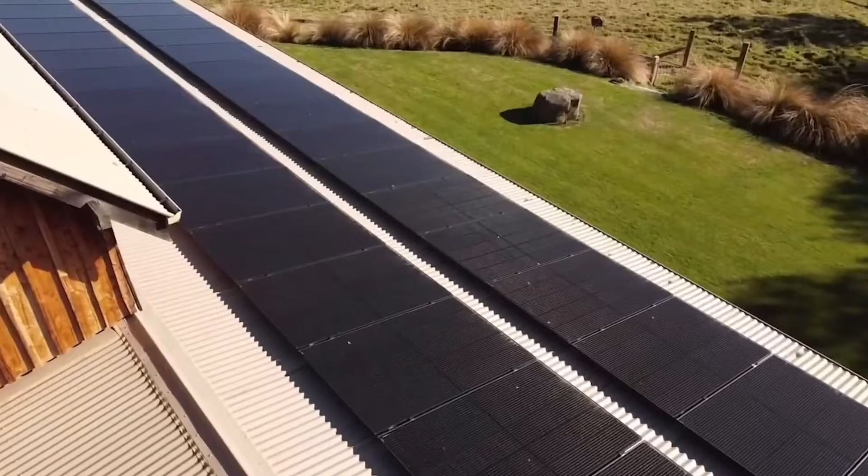I'll leave it to the experts tonight, but just give you a quick 2-minute overview of Lightforce and how we get to here.

Originally from the UK, as you can probably tell from the accent. I was an electrician by trade and went off travelling about 15 years ago.

Landed in Australia and we were there just as the Rudd government released the subsidy for solar. It was 2008, solar just started to take off. I was installing panels over there, and then I decided to move to New Zealand and expected to see a pretty similar landscape, and arrived and there wasn't a panel in sight.

There was a car battery and one panel on Rakino Island, and it's still working today, amazingly.

We basically were subcontracting. I started the company 8 years ago, it was man in his van, and we were subcontracting for all the different companies at the time that entered the space early. Most of them have subsequently been and gone.

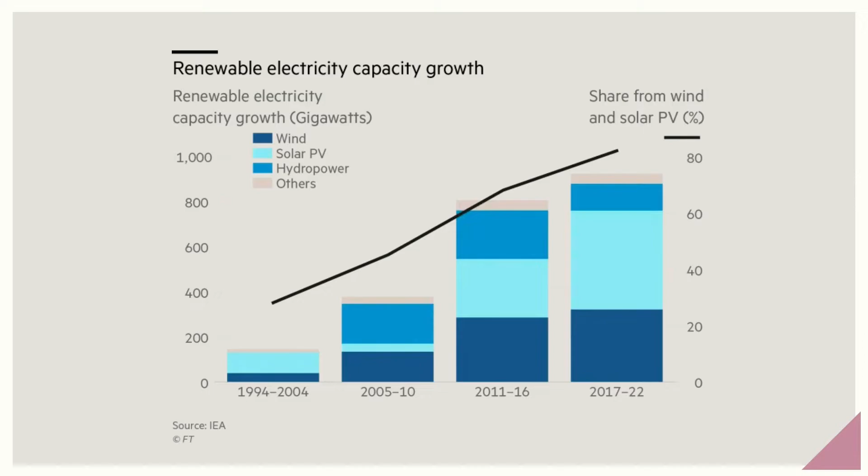So what is a disruption? It's when a new product or service creates a completely new market, and it massively transforms or completely destroys existing markets, products, or an entire industry. And that's exactly what we're seeing happening here in transportation and energy.

It's a classic technology disruption. I talk about transportation and energy at the same time because they are part of the same disruption, and they're quite closely related. A technology disruption happens when a number of exponentially improving technologies converge at the same time, and then they go on to accelerate each other's innovation and adoption.

What's happening here? There were a number of technologies that made this thing possible, converging at the same time, all accelerating each other's innovation and adoption. Computing power, data storage, digital imaging, network capacity, lithium-ion storage technology, GPS, touchscreen. All these things converged at this time in 2007 to create this pretty amazing piece of kit.

So what's happening in the case of energy and transportation, because again, these two are closely linked. What are the technologies at play in this massive disruption we're seeing right now? Obviously we've got solar PV, lithium-ion battery technology, electric vehicles and autonomous vehicles, and TaaS - transport as a service, on-demand transport.

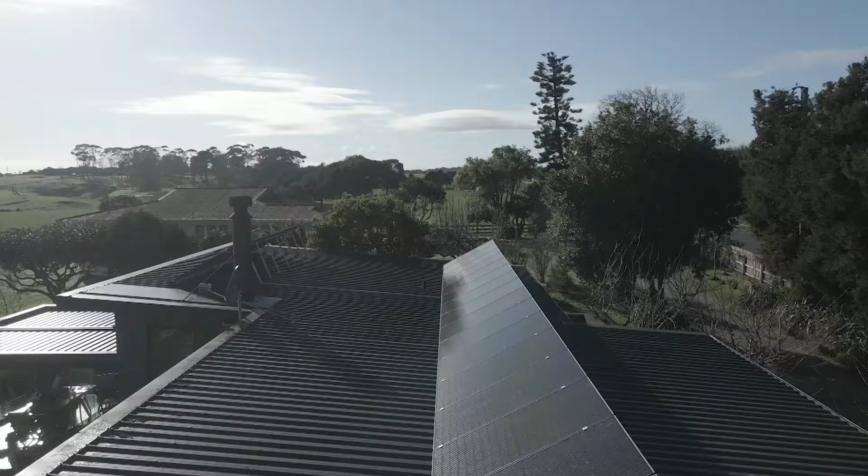In the winter months, obviously the light is a little lower here, but we do experience some sunlight as time goes by, and Lightforce set up the most consistent usage to gain maximum benefit from that.

The guys turned up, they were very personable, they explained everything they were going to do, they were careful around our house, which was important to us because it's a brand new build.

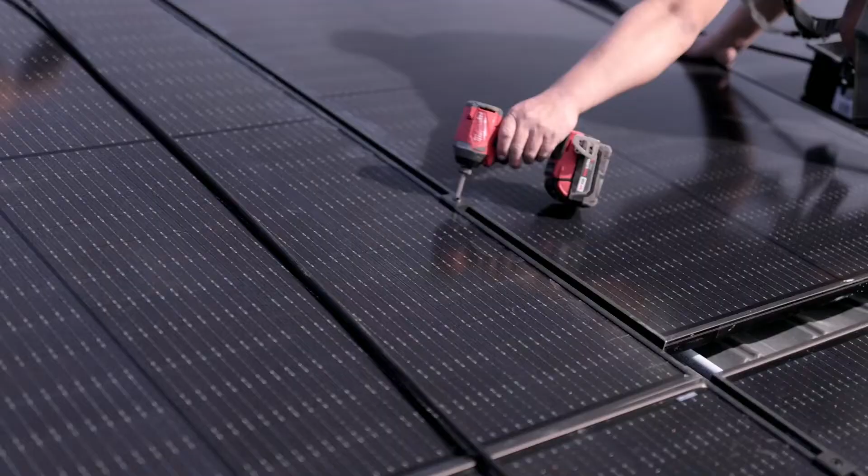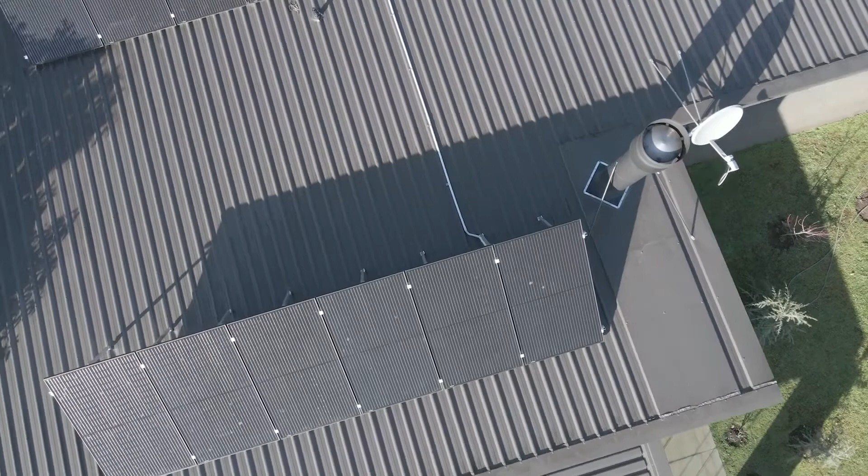One of the guys who turned up, I found out later, I didn't realise at the time, but it was the boss of the company. And that really impressed us, that the boss was willing to come all the way out here and have a look at the system, make sure it was being put in properly, and extremely personable. We really found that was a great thing to be able to see happening.

We understood basically when we put a system in, it would have quite a load expectation because we have a big spa pool, and also my mother-in-law lives with us and likes the heaters on a lot, so we needed a system that could cope with us.

So we have 22 panels on our roof, and we put a battery in to hold that, and we also later on decided to put another battery in because we wanted to save as much sunshine as we could along the way. Part of also what we're doing here is the aesthetics of the place.

It was designed by an architect, so to have the black panels up there which fit in so beautifully and make the place look really great. There's a talking feature also for our friends who come around—they all comment on it, which is lovely.

In New Zealand, we need to be thinking about sustainability. We need to be thinking about how we can make the most of what we are able to do with technology, and the system Lightforce has put in fulfills all our needs with that, and means that we can also feel that not only are we getting our electricity free, we get water from the heavens, we get sunshine from the heavens, and wow, life's good when that's happening.

Little introduction of myself. So my name's Jordan, I'm a senior consultant here at Lightforce. As you can probably tell by my accent, I'm not from New Zealand either, a bit like Luke. I've been in New Zealand now 4 years, no plans on going back to the UK anytime soon.

I had actually taken a job—I've been with Lightforce 18 months now. I'd actually verbally committed to another job 18 months ago, and my friend said, come in, have a chat with the guys at Lightforce, just have a chat. So I thought, what's the harm in going in? So I walked in, came out an hour later.

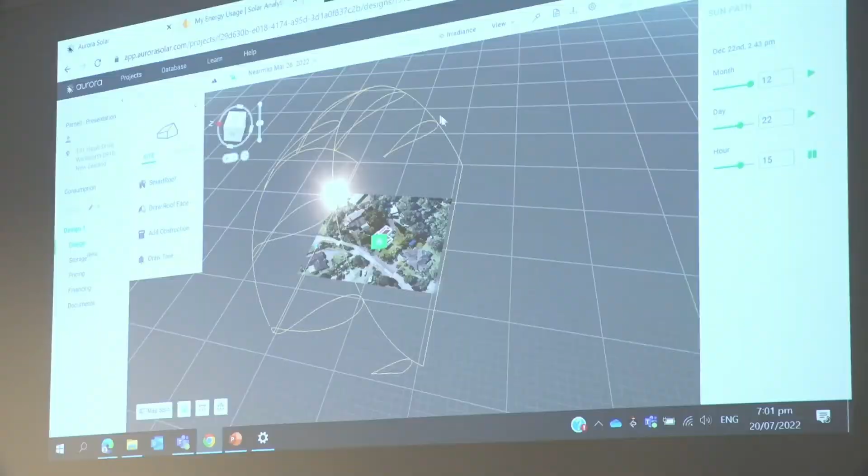Because what this software is going to do is plot the sun's path across the whole year. Really nice and high in the sky, you've obviously got your summertime. We're down here today, so if we look at the sun's path today, which is the 20th of July, that is the sun's path today across the sky. The cherry on top with the software is that it also factors in 10 years worth of local weather data. So what this software ultimately gives us is the most accurate numbers we can give you as to how much solar power we can generate on your roof. It's pretty cool.

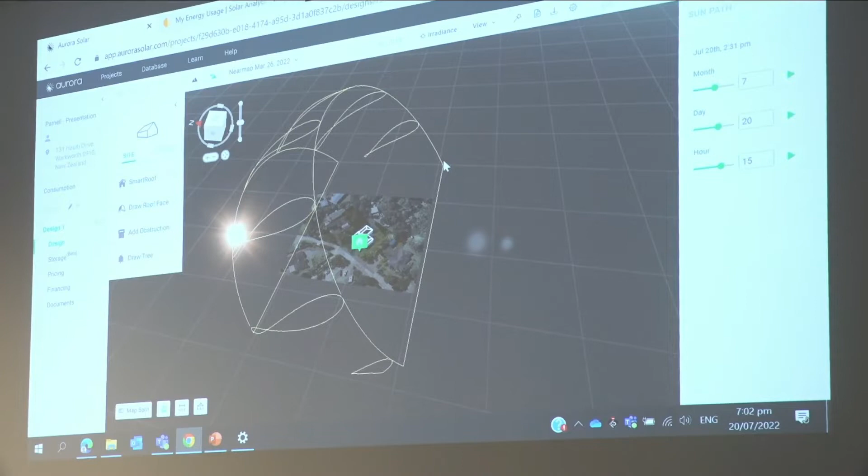Before we jump into any consultation, what we do is get a couple of power bills from you. There's a lot of little crumbs of information we need on the power bill. Ideally we want a summer and a winter bill, because a New Zealand home will use considerably more power in winter with heating than in summer. Before any consultation, we'll load in roughly how much power you use across the whole year. That's completely different for everybody we sit down with.

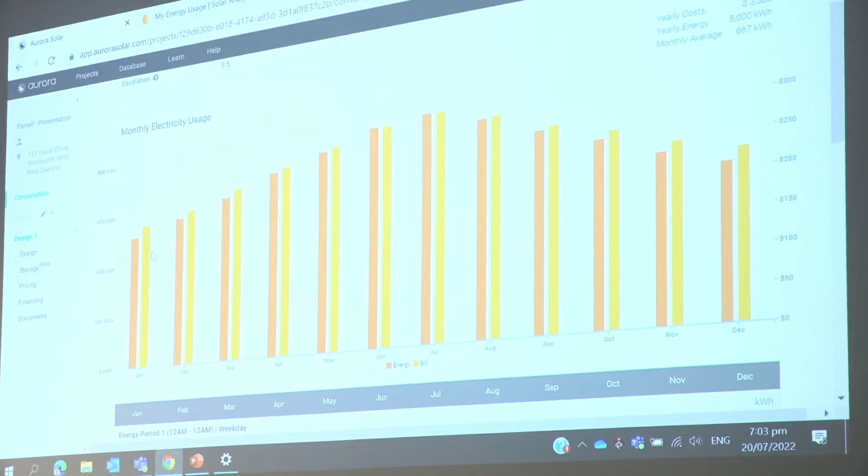So this is a standard New Zealand home, and they're using 8,000 units of power. You've got your peaks in June and July naturally, and less in your summer months, January and December, and we can pretty much fill in those blanks in between. That's why we only need a summer and a winter bill.

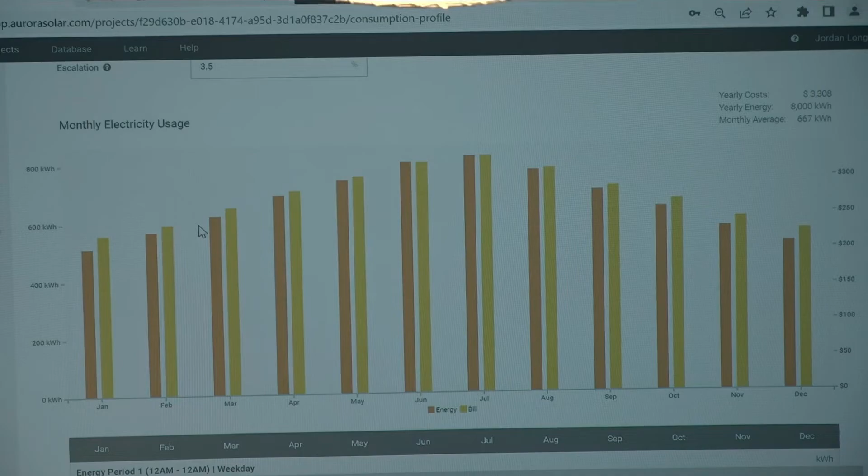We'll also look at your power bill every single day to see if you're being robbed blind by the power companies. It happens far too often where people don't know what's going on with their power bill, and they're on the wrong tariff, just wasting money. So we'll look at your power bill and load in how much you're paying for power into this software. Now, before we even jump into the design, we've got how much you pay for power, how much you use, and roughly how you use that power across the whole year.

So let's jump now into a design. It gives us a 2D image of the home, and this is a really nice house for solar. With this software now, we can actually build this home in 3D. We start quite simply, and it does all the work for you. Anybody could do this - all you have to do is follow the edges of the roof.

The pressure's immense to make sure I'm nicely on those edges. There we go. So now it's going to give us this is what it thinks the home will look like, and we're just going to edit it a little bit here to get the folds in the roof there. Awesome, home is looking good.

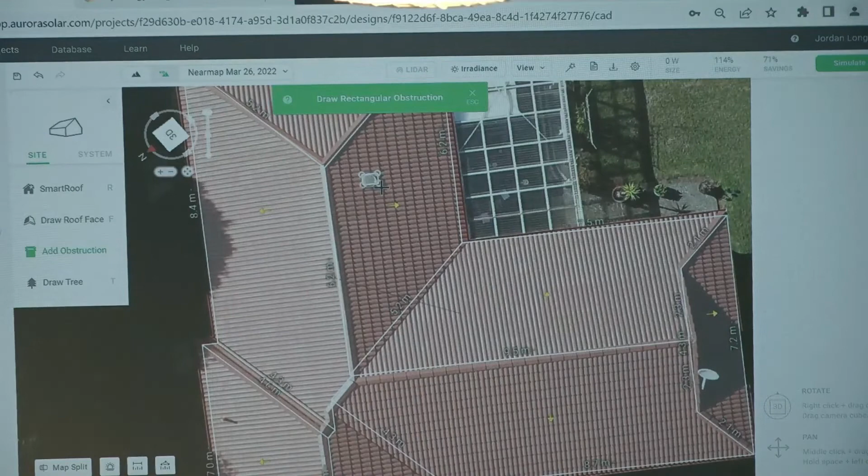Pretty spot on there. So now another thing we look at is any obstructions on the roof - little vents, satellite dishes, aerials, chimneys and stuff like that. Fortunately we've only got this, what looks to be a little solar bubble here, so we're going to pop that as an obstruction on the roof. We cannot use that roof space there. And we also have a little vent there, so let's pop that little vent in there.

Great, so now we've modeled the home and any obstructions on the roof that's going to be flat on the roof. Now what else is important is we need to look at any shading - the trees around the home - and you can actually see on the roof here in this photo that there is a shadow being cast. So we can pop into street view here.

So essentially what we're looking at on the left is the actual home, and we can go down the road and look at those trees there. Those trees aren't huge, fortunately - if they were absolutely massive it would be a slight concern - but we can now model those trees based on looking at that.

Okay, so we're looking at the pitch of the roof - it's a pretty standard pitch roof there, about 20 degrees - and we're also looking for any trees around the property that's going to cause shading. So what we can do now is start popping trees down here. Let's draw some trees. This is important because it will cast a shade on some panels if we put panels here, so it's important that we model that in our software.

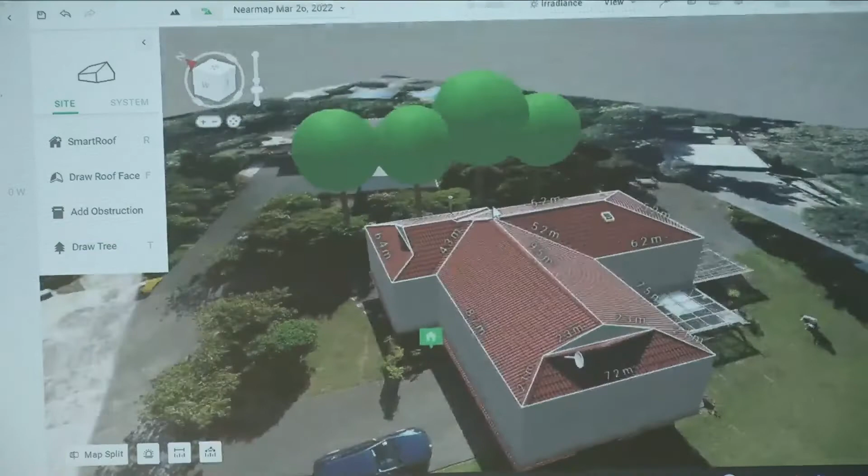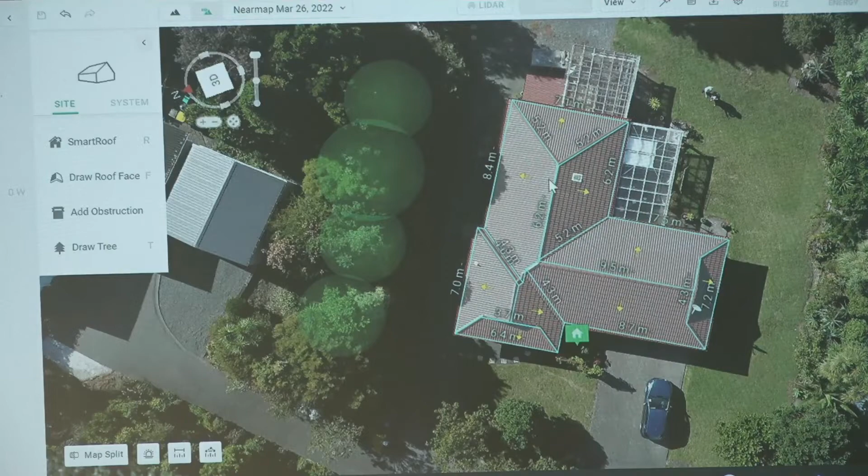There we are - so we've got the house modeled really accurately in 3D, any obstructions on that roof that's going to cause issues for putting panels there, and we've also got the trees modeled there that could affect generation on the roof. So what I'm going to do now is run what we call an irradiance report. It's going to calculate everything I've just gone over - trees, vent, satellite dishes, the sun every month of the year - and what it's going to give us is some nice colors after all that.

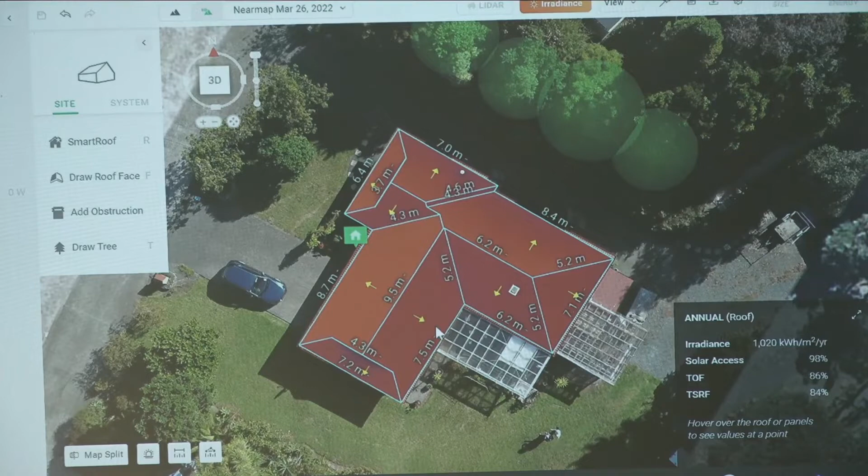There we are, so we have some nice shades of red there. Essentially this is visually showing us the best roof faces for solar, with this lighter red being a slightly better roof face than this southwest facing roof here. It's a different shade of red at the bottom of this roof because it's factored in the shading of those trees.

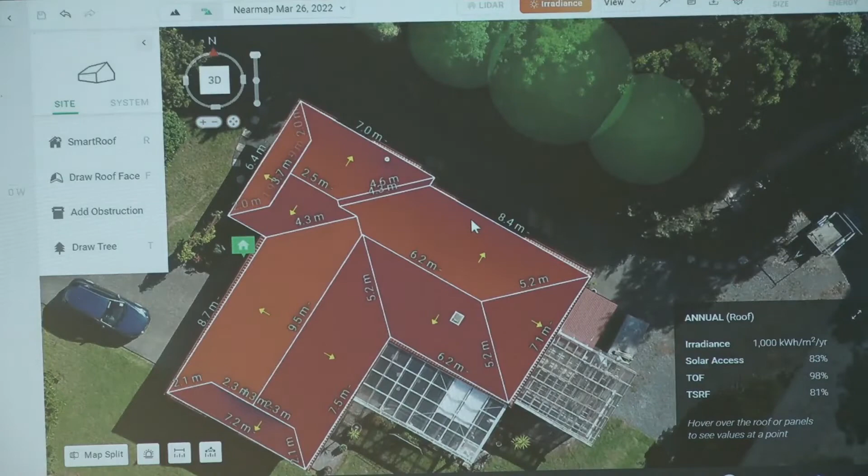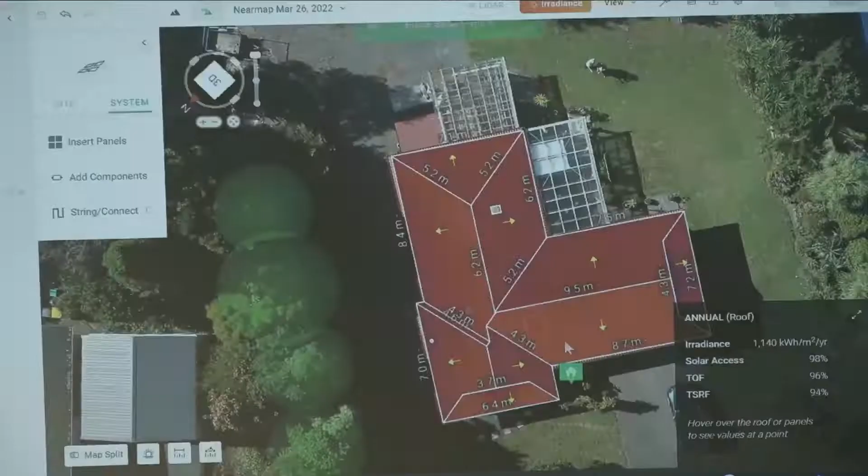So now comes the fun part, where we design the solar system. We program the specs of the panels we use, then grab some panels and start putting them onto the roof. The best roof faces for solar on this home is this roof face here, and quite nice and high up on this roof face here.

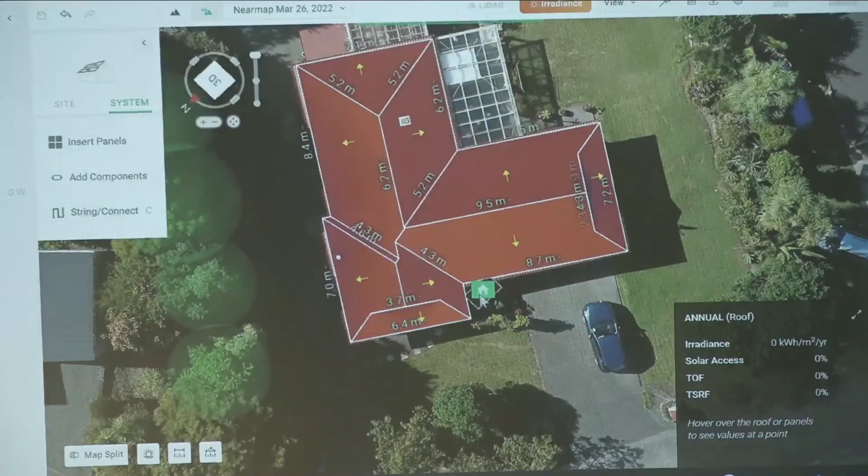Of course this is very much a custom design system. Some people don't want panels on certain roofs—somebody might say they wouldn't like panels there because it's the first thing they see getting into their home. Panels we use now are all black, they look particularly slick. So if we're just designing a system based on best roof faces, we can start putting panels onto the roof. Let's get rid of that irradiance and pop the panels on the roof there.

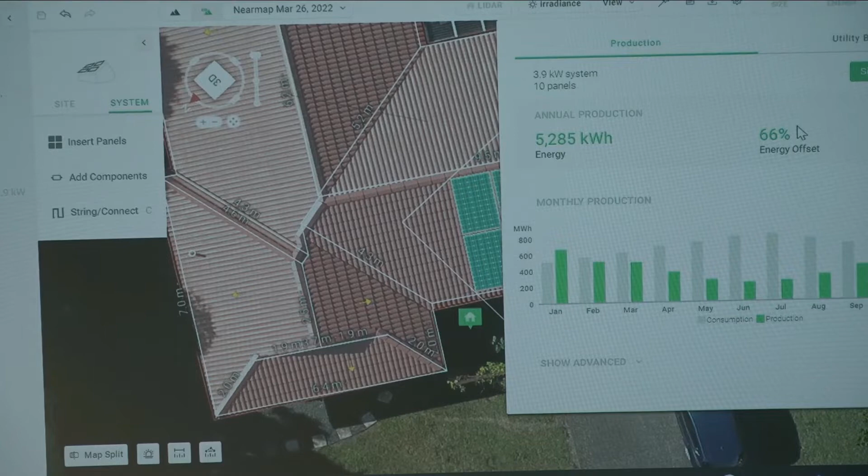We've already preloaded how much power you use. If I pop 10 panels on the roof, that's a 3.9 kilowatt solar system. This runs a quick simulation comparing how much you're using versus how much you can produce, side by side, giving us what we call an energy offset—what percentage of your power use across the year we can generate. So we're at 2/3: two-thirds of your power can be produced by just 10 panels on this roof.

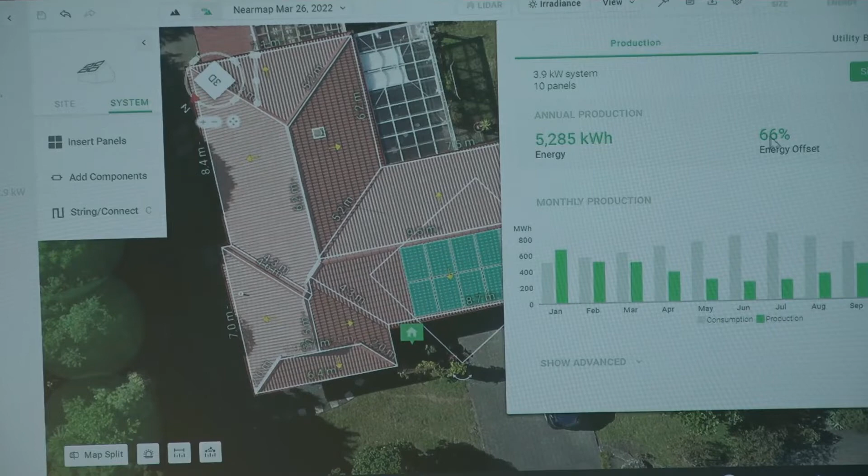So you could certainly justify more generation. If we're going down the battery route, ideally we want that number at about 100%. We want to generate what you use across the whole year so that we can charge a battery, and that's going to really be 80-90% plus savings on the power bill.

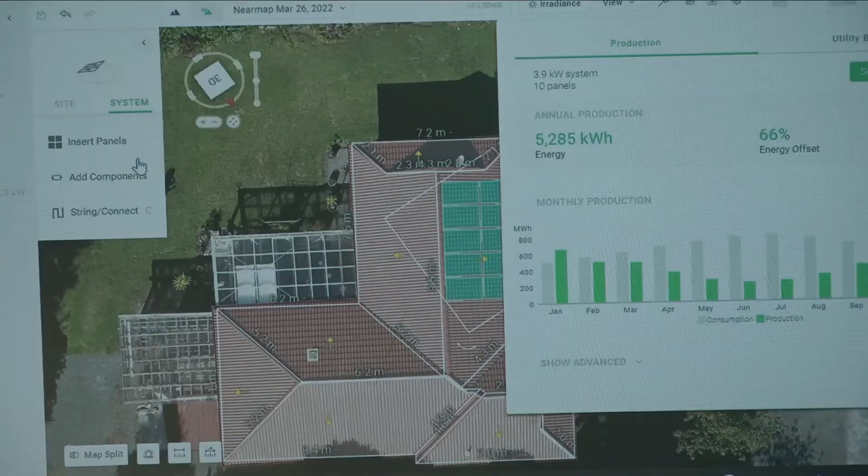So if we pop more panels on the roof, let's add a row of 5 across there—let's get more generation, you can never have too much power. Now we've got 15 panels on the roof, producing 7,788 kilowatt hours of power, which for a standard New Zealand home that uses about 8,000 units, means this system is producing what a standard New Zealand home would actually use in a whole year.

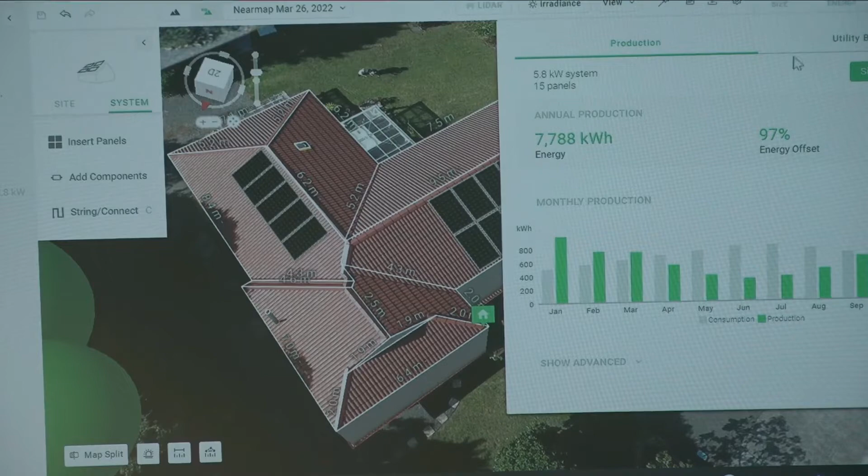So what we can do now is, at this point we can put panels on or take them off, but we can actually look at what that would do for your power bill. We've popped in the rates that you pay for power, so there's no cookie cutter quotes—this is all bespoke, all custom made. Let's pop in some standard pricing, basically the average New Zealand power price.

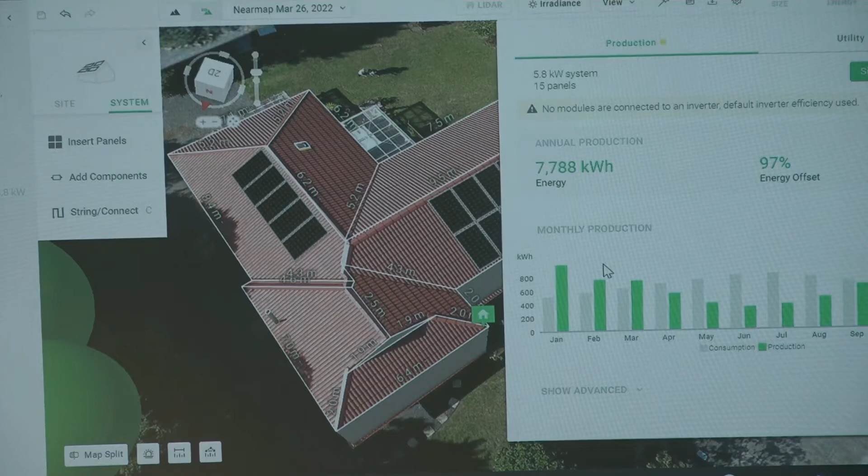When it runs its simulations, because we're producing 97% of the power on your roof, that does not unfortunately mean we'll reduce the power bill by 97%. Because if you're producing power you don't need, you're going to sell that back to the power grid for a credit. Believe it or not, that's not a one-to-one exchange—the power companies are not going to pay you what you have to pay them. So with this system, you'd be selling quite a lot of power back to the grid at not a fair exchange rate.

So with a solar-only system, with this 15-panel system, you would expect to reduce your power bill by about 45%, give or take.

So that's got some really clever calculations on the back end that Aurora have done, basically showing how much power of that production you will use. So what we can also do on this software, as I touched on earlier, is look at your power rates and see if they're competitive at all.

Sometimes people are really onto it and rechecking their power bill every 6 months, which I'd advise. But if we look at your power rates and they're not very attractive, certainly not attractive for solar, because a lot of power companies out there - there's some that are better than others in terms of what they pay you.

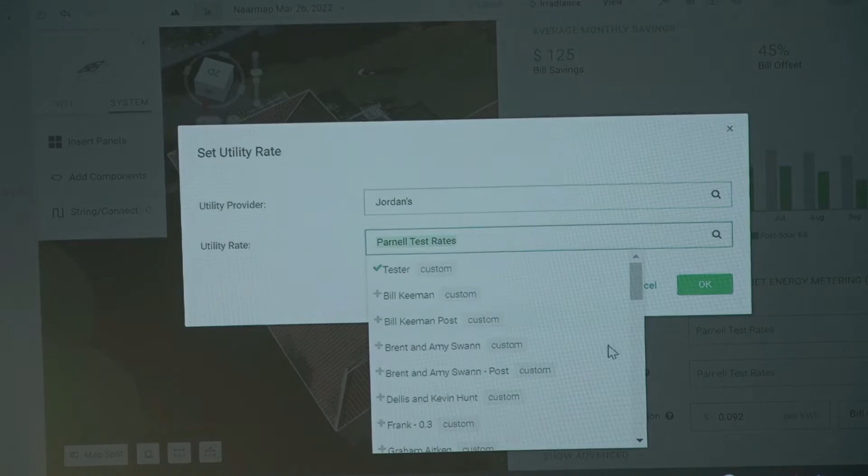So if I was to change these power rates here to Lightforce power rates, for example, we'll check a few different rates. We do this every day, so we've got a really good idea of what the good ones are. So if your rates aren't that good for solar, let's see what the savings would be if you went onto Lightforce power rates.

And if I run a simulation on that again, the only thing that's changed is the power rates. Once you've gone solar, you can see the power bill savings are significant - that's just based on going onto a really competitive solar rate. That's gone from 45% to 66%, so now you're looking at reducing that power bill by two thirds. If you were to add a battery onto this system, you'd be expecting a reduction in your power bills of 85, 90% plus. That's just based on solar only, not a battery system.

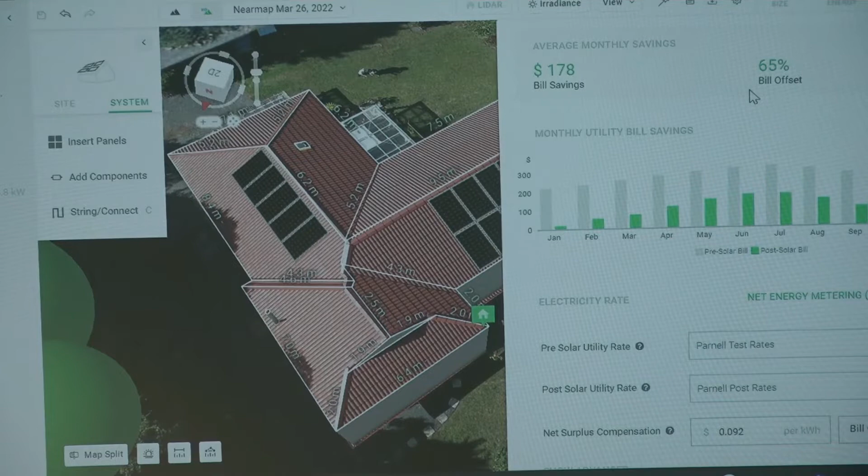So that's kind of how we design all our solar systems. Does anyone want to be brave and give me their address, and be kind if it's a difficult roof?

Yeah? Yep. Right, let's do it. Number 10, Andre Rise - A-N-D-R-E, Rise - um, Bay. Andre Rise, Stanmore Bay. Right, waiting for Jim, everyone.

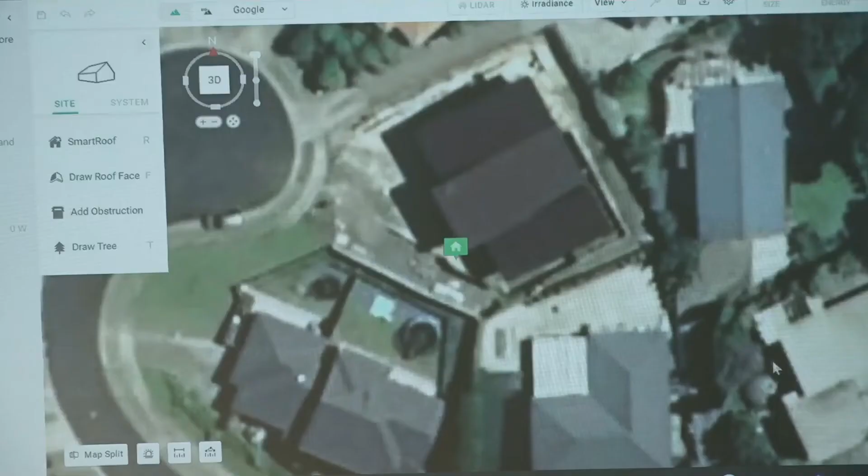No problem, so let's do it now without all the prep that's gone into that. Fortunately, we've got our nice crystal clear satellite imagery - I was worried that we wouldn't have that. So let's look at your roof, and it looks to be really nice for solar. There's a builder's pole at the moment, so there's no record of the property properly. There we are, so we have - that's you?

That's it. Waiting for Jim. Gonna go - there we are. So you've got one that's angling towards east, one that's angling towards west, and one that's angling towards east. So ultimately you'd have the option - is it quite a monopitch roof?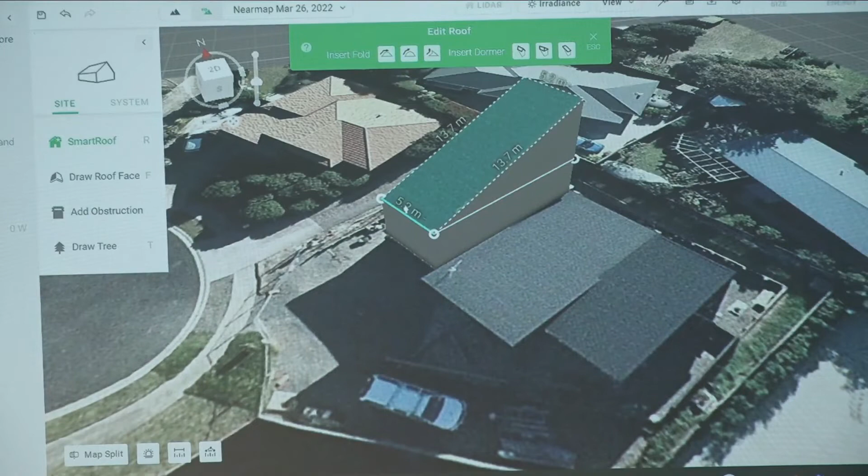What would you say your power bill is on average? We're not in yet - stabbing in the dark, it's on a builder's pole at the moment.

So you have essentially, you could have the outcome that you wanted from solar. We are limited by roof space quite a lot of the time, and it's not always possible to really eliminate those power bills, but it's certainly possible with you. So it would just be a question of how many panels you wanted in there.

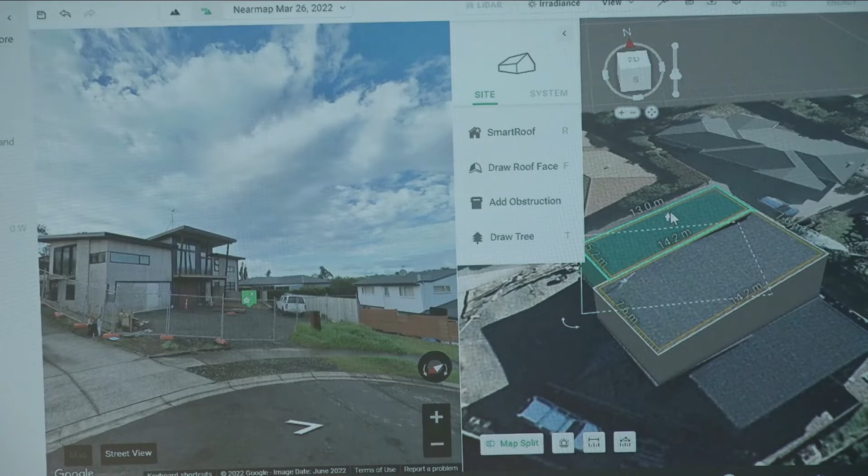No trees around there at all? Yet - what do you plan on planting?

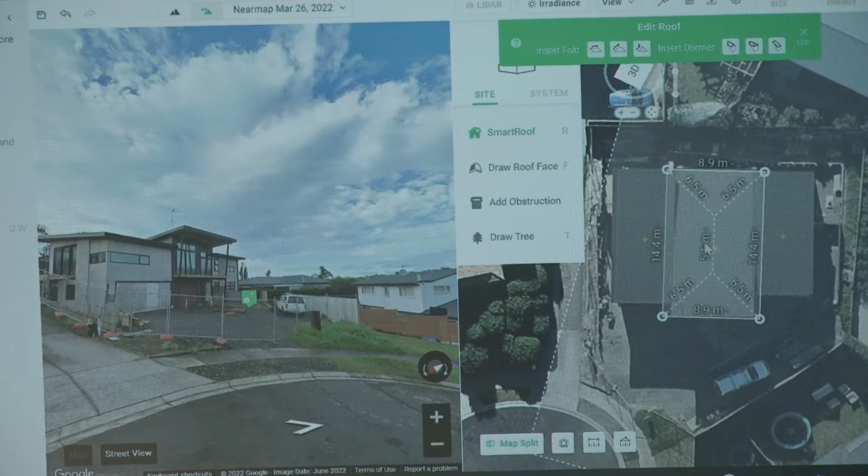No, that's the wrong way. Pressure's immense.

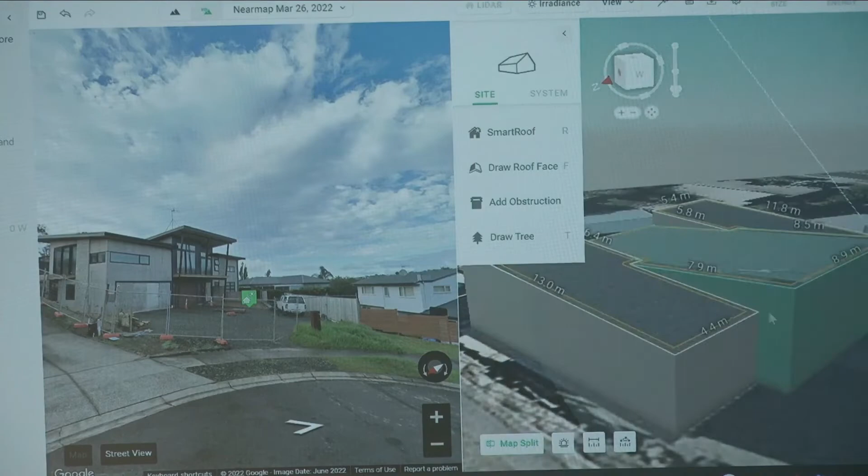There we go, so there is your home, or pretty similar to that, isn't it? Feel free to say no. It should be about 170 square meters, something like that.

So ultimately, you'd have the option with a home like this - you could tilt the panels towards north if you wanted to, or you could put them flat if you didn't want to see them on tilts. But if I run an irradiance report here, you've got 3 really nice roof faces for solar.

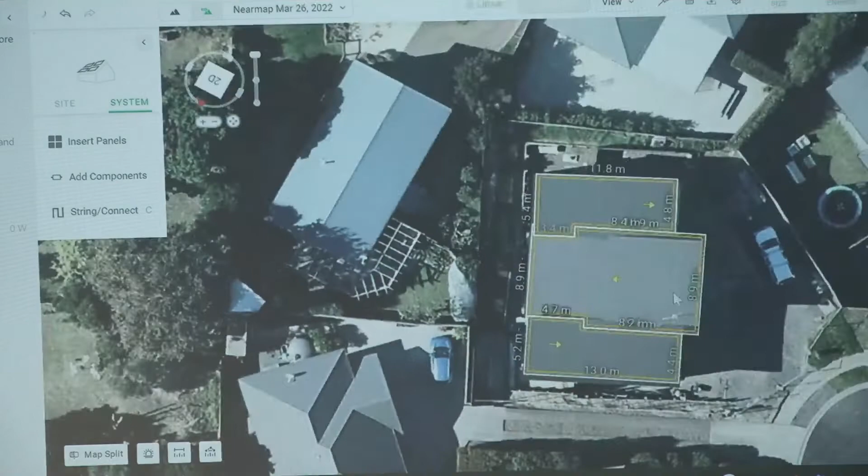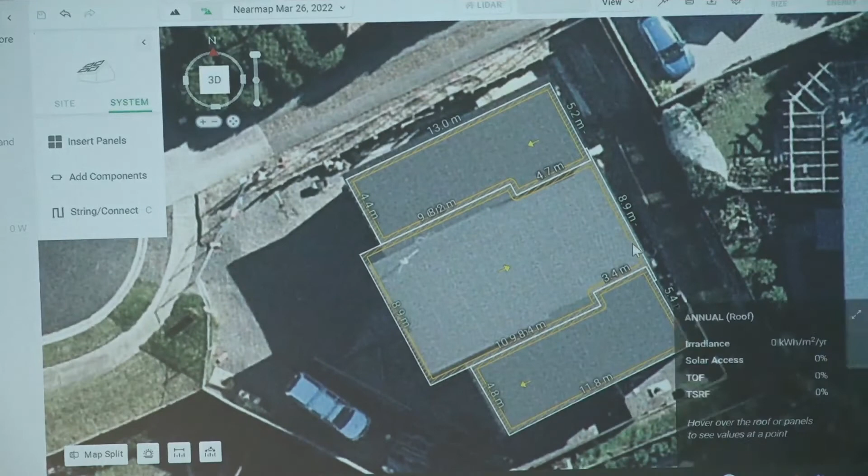You're going to have the outcome that you want from solar. Oh yeah, it's as simple as that. It would just be a case of how many panels, because you could go crazy. You could go absolutely mental on that roof, and that's only a third of them.

That's the modeling software that we use. It's all data driven, so we give it loads of data - how much power you use, what you pay for power. I'm a bit of a numbers nerd myself, so I do little audits of this versus my actual customers that have gone ahead, and we look at their data. I've never had this software be below 95% accurate of what it's told me it's going to produce versus what the customer actually gets. This software is amazing. It takes the guesswork out of it, and it's fun - you can play about throwing panels on the roof all day.

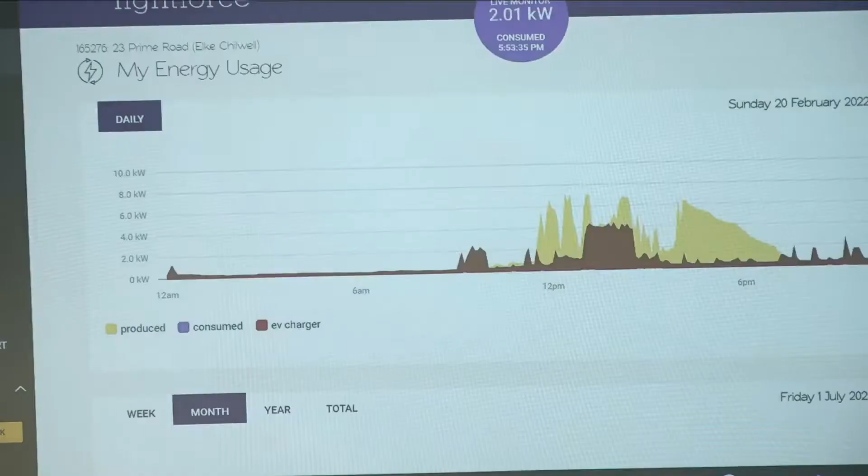So that looks great, but we've also got to show you the monitoring that we use. This looks great in theory, but how does it actually work out in real life? So I'm going to take you into the back end of things here - this is the monitoring software that we use.

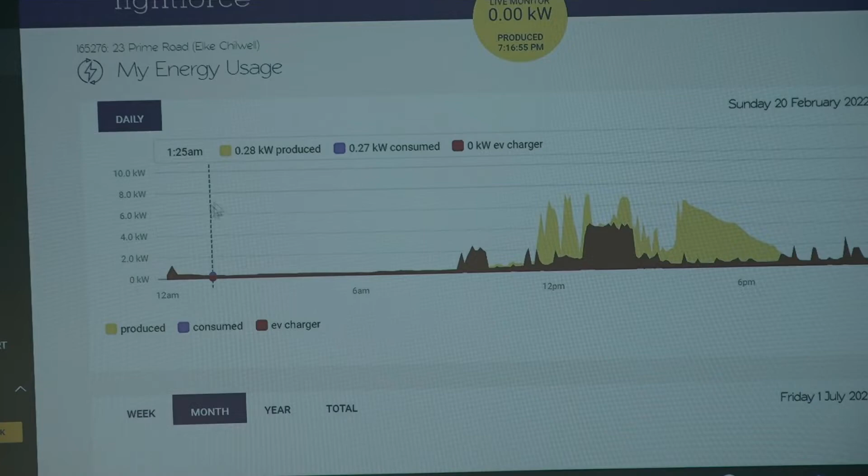I've grabbed one of our customers called Elke, who's our biggest advocate - she absolutely loves us. This is her system, and she's had a system with us now for years. So what you're looking at here is called Solar Analytics - really, really cool in-depth monitoring of your system. I've gone onto Elke's because she's got a whole year of data.

So I can actually show you what her power bills have been. If I jump back to January 2022, you can see her power bill. She has a battery system, 27 panels, so a nice big system with a battery. Her power bill for January was -$91 - so the power companies owed her money. It's not just a pipe dream that power companies can actually pay you money, it happens in reality. Yeah, her power bill was -$91 in a summer month.

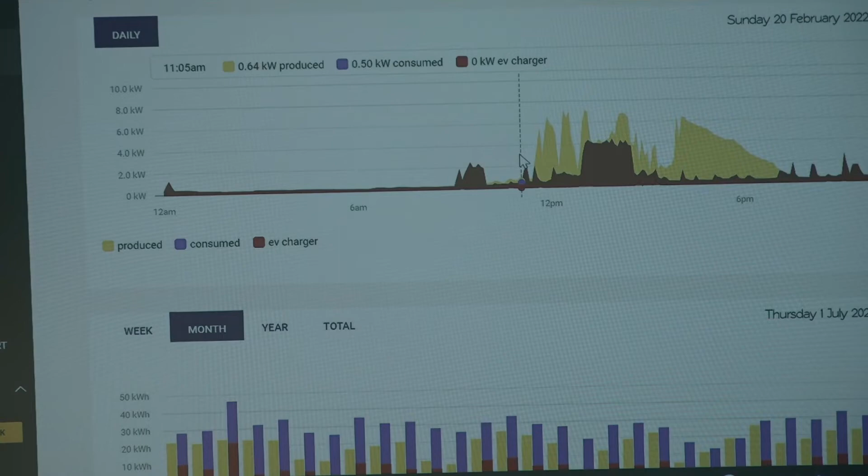In December, -$62. And if we look at the winter months - it's important to note with solar, we're generating a lot of power in summer when you use less power, compared to winter when people use more power. In winter her power bill was $83, but that was offset by how negative her power bill was in January. This is a real example in play - you can see how much power every day she's producing and using. As a numbers nerd like myself, we love this.

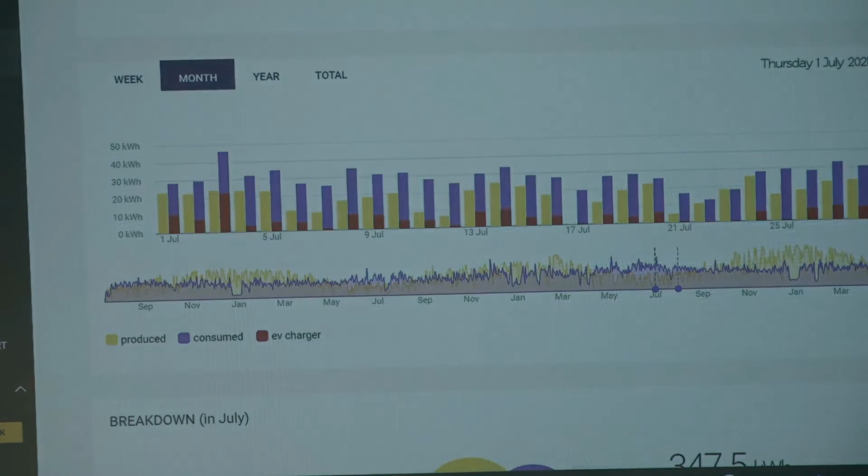So that's the software that we use. Aurora Solar is how we model all our solar systems, and then we monitor all our solar systems using Solar Analytics, in-depth monitoring - you can basically start putting in your power tariffs and stuff like that to see how much you're actually saving in reality.

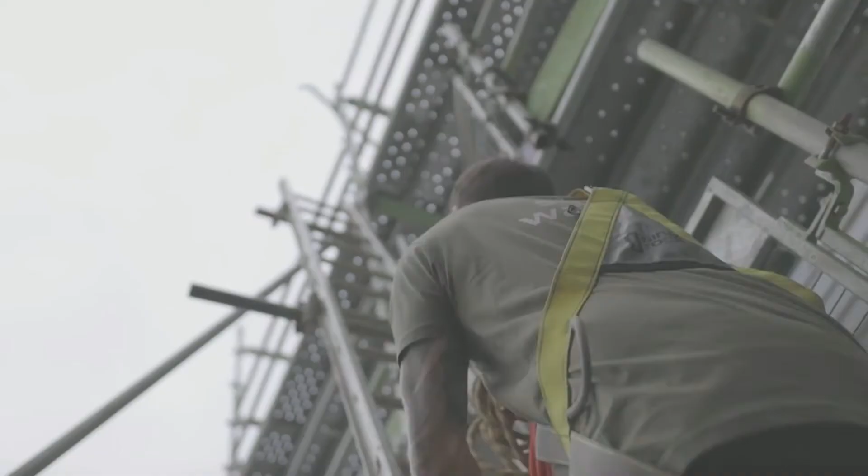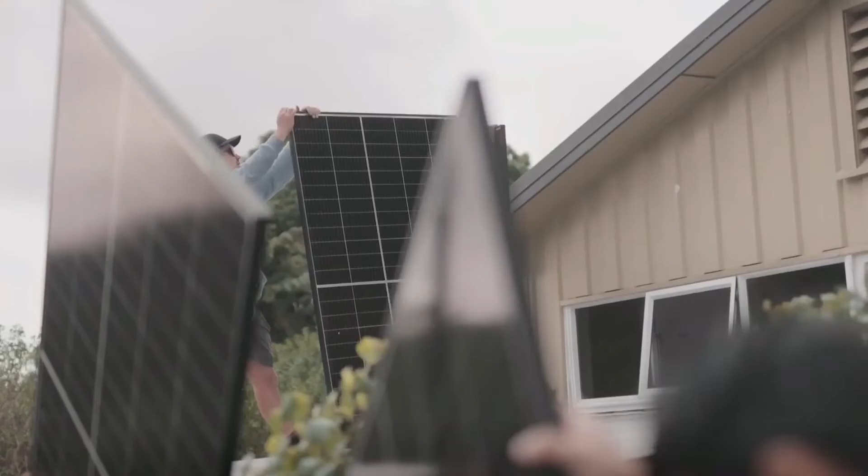Our carbon reduction journey is underway, and we've taken that first critical step by measuring and offsetting our carbon emissions, so we can proudly say that Lightforce is operationally a carbon neutral business. While giving New Zealanders access to clean, green, renewable solar energy by putting solar panels on the roofs of homes and businesses all over Aotearoa is a really great thing, it's really not enough. So it was super important to us to commit to the carbon neutrality of our operations too. So we engaged the awesome team at Ekos to help us begin this journey.

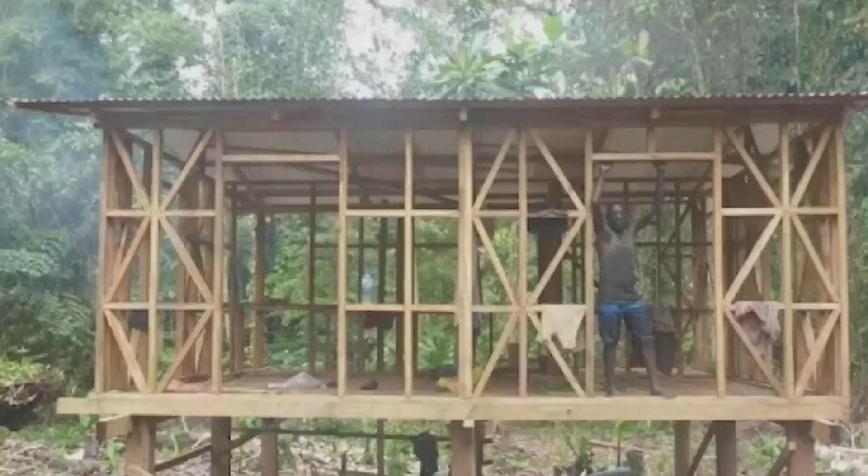We chose to support the Babatana Rainforest Conservation Project in the Solomon Islands to offset our carbon emissions. Now this is a pretty special project because unlike the planting of monoculture trees just to generate carbon credits, this project's actually owned and run by the indigenous peoples of Sasamonga. They've given up the rights for logging in exchange for the opportunity to sell carbon credits from this lowland tropical rainforest. The forest is also incredibly biodiverse, home to thousands of unique animal and plant species. And this land is also the main source of food, income, medicine, building materials and water for the local families.

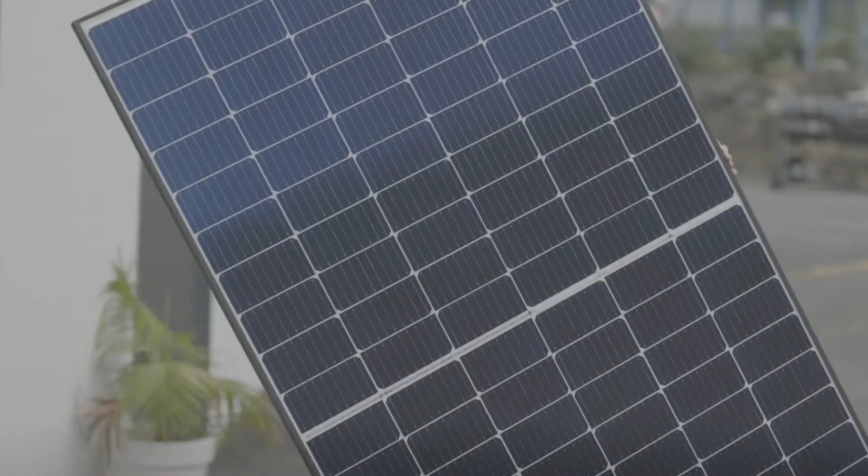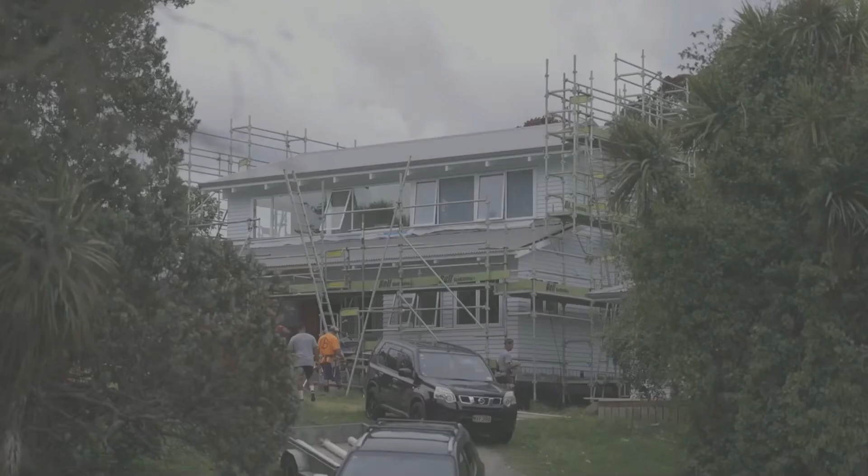We really wanted to support a project that had a meaningful social, not just environmentally positive impact. While it was essential for us to offset our emissions after the completion of the project, the primary intent of this journey for us really was to gain a real insight and understanding into the impact our business has on the environment, to be able to make changes to the way we operate and build an actionable framework to do better, especially as we continue to grow and expand. Our vision at Lightforce is to empower a lighter, brighter future for our environment and for our people, and that requires some serious mahi and commitment. We believe it's our responsibility as a business and as individuals to drive that positive change.

So yeah, really cool project we invested in the Solomons. Again, important that we could achieve a positive environmental and social outcome at the same time. So that's why we did go offshore to offset our emissions.

And that next piece, the brighter future piece, that's all about empowering positive outcomes in our communities, which is really important to us at Lightforce. The positive impact that we can have out there.

Our work in this space really sits under four key community pillars. The first one is all about training our future, and we really believe that giving education really is the greatest gift you can give anyone.

Our New Zealand first and only solar-focused training academy in Mount Eden, backed by the Ministry of Social Development, is really this in action, presenting opportunities to our rangatahi, the next generation, that need them the most.

Then we have our Solar for Good project, which we touched on earlier as well. That's donating systems to charity and organisations doing really awesome work on the ground in our communities. And the Growing a Lighter Future piece is all about sustainability in our own backyard.

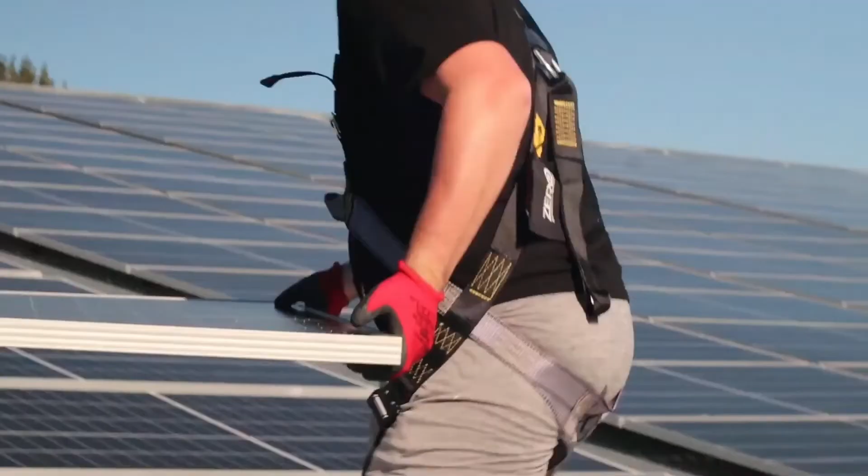One of the biggest things that I've learnt during this course has been how the solar panels are put on the roof and the wiring that goes into it, and then about the inverters and stuff like that. I didn't really know anything about the process coming in, and now I know what the process is.

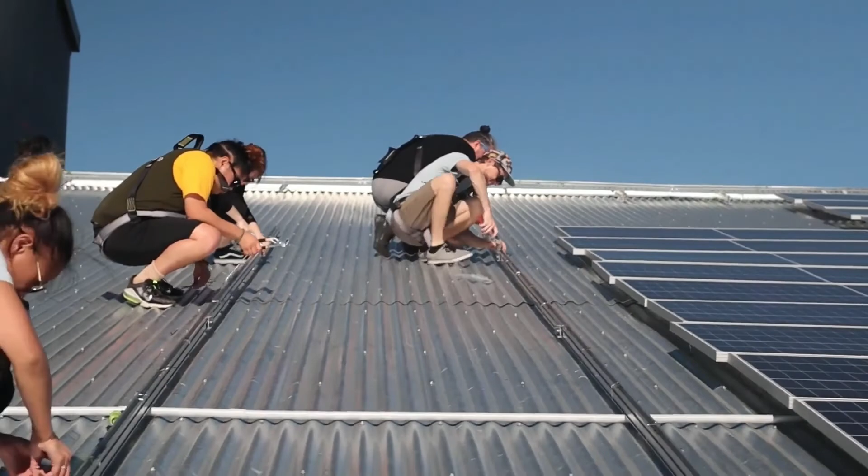One of the best things I've learnt on this course is trying something new, something physical, and the satisfaction you can get from a job doing that sort of thing. It's been awesome just to do something that I'd never considered before.

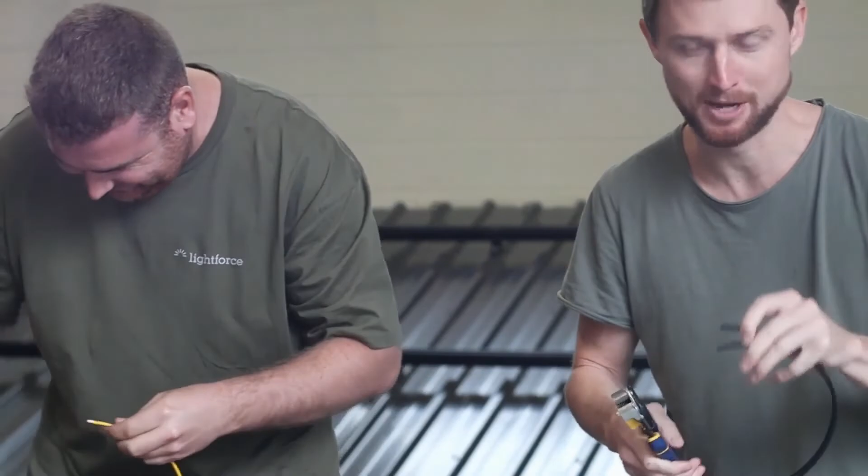So coming into this program, it just opened my eyes into a big part of life, a life that so many people lead and really enjoy, and I can see why they enjoy it. It's great. What made me keep coming in every day was the atmosphere, the approach to everything.

A lot of courses are very, you just sit, get spoken to, whereas this was very interactive and a lot more personable. One thing I learned at the academy, especially with the cabling and the crimping, is that if you take your time and do it really nice, it's going to come out with a great result and look really, really good too.

And if you don't crimp some of these things down properly, they'll just instantly pull out, and then you can short one of the boards. I was surprised to learn a lot.

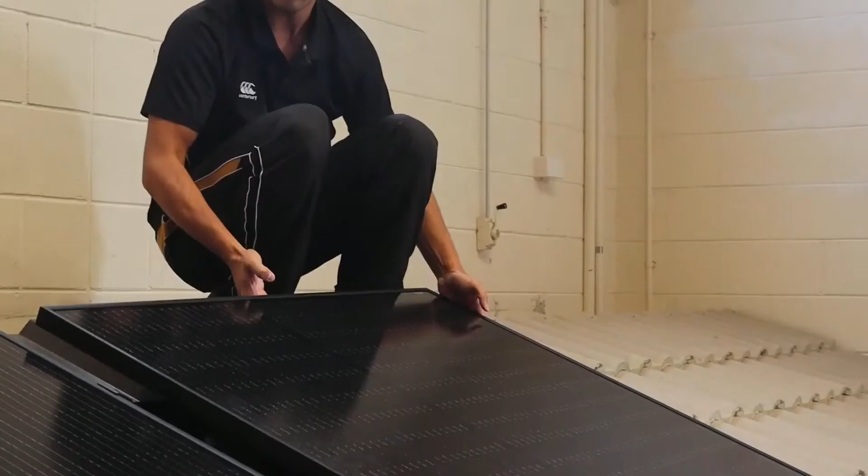About myself through engaging with my peers at Lightforce - it was something that definitely took me by surprise, and the reflections I gathered working with my peers have been very useful to me in my own personal life.

Honestly, what surprised me the most about the course was that a private company would be this holistic and caring about someone who's not even an employee yet. Other companies, you could work for years and they wouldn't take a chance on you. Without even having started, we got forklift, working at heights, asbestos training. I think even if I didn't work here, those skills are going to set me up for life.

They have created a space and environment for me to be my true authentic self, to share, to feel understood, to feel seen and supported. I made a really good friend of him, and I'm crying now.

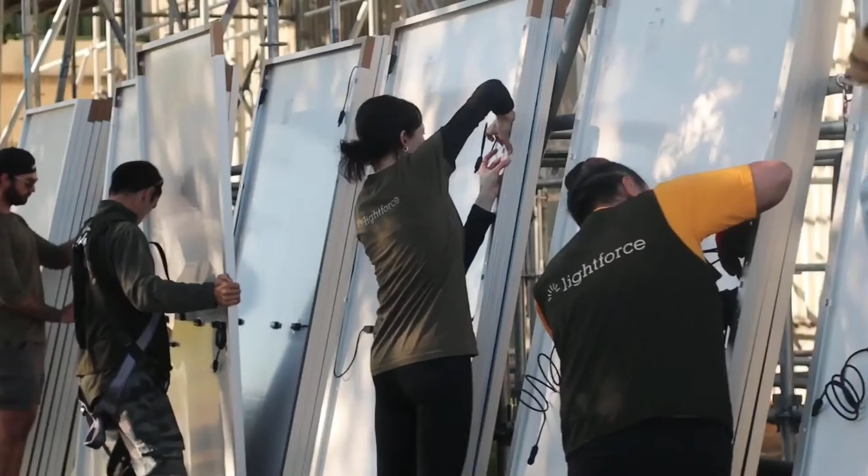It feels like I'm coming to a marae every day and finding my way again. I've pretty much been brought up in a marae, so I know my place. I feel like I'm in some sort of belonging here. The love that I get from this place, it's for my own self and my own growth.

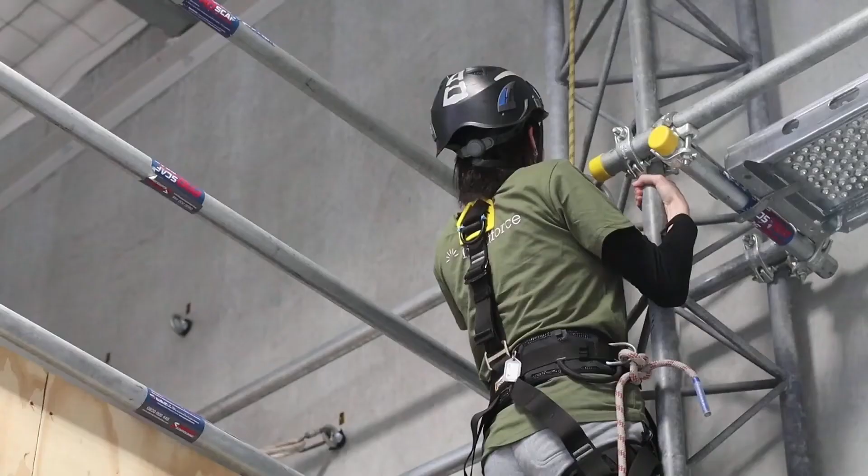I've done quite a lot of things, but this will be number one for me. One of the happiest moments I've had was probably when we did our heights course, and I got right up to the top because I was really confident and got really into it, and then I had a bit of a moment. But the happiest moment was just when I got back on the ground and realised it wasn't that bad and I was in control the whole time. I had all my peers around me saying, you were good, it was all good, don't worry about it. I was able to conquer so many fears that day that I never thought I'd be able to.

I really didn't know what to expect when I started Lightforce, but I think it gave me everything that I needed and more. Not only have I now got a career plan and a path, I've got a whole bunch of new friends and just a whole new outlook on life. I didn't know there were people out there genuinely trying to do good things like this.

It's amazing to see our first 50 students through, and next year we're looking to bring on over 200 students. Every single one of those students, bar one, has come into employment with Lightforce, whether they're installing or in our lead gen sales team, and they're killing it. It's very, very cool to see.

An initiative we have, which I touched on, is our Solar for Good project, where we gift systems to charities and organisations doing amazing things in our communities. When we open a new hub, we engage the community on the ground, running a campaign to find out who's doing amazing things locally. The community votes on those organisations, and we install a big system with energy storage so we can significantly reduce or wipe out that charity's power bill, so they can put those funds to better use.